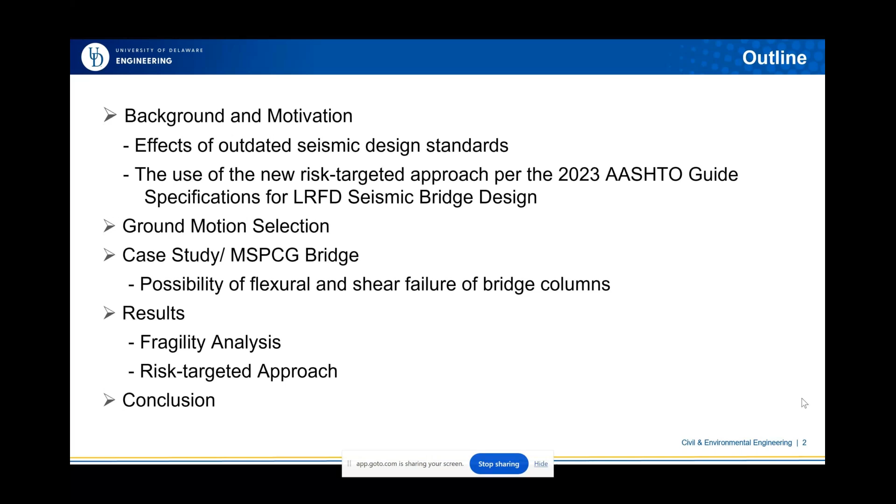Okay, starting with the background. In this research, we focus on existing bridges in the Pacific Northwest region, which includes both Washington and Oregon state, where the Cascadia Subduction Zone is located at the edge of these two states. The Cascadia Subduction Zone is one of the biggest subduction zones around the world, about 600 miles, running from British Columbia up to northern California.

The orange line in the figure shows the edge of the subduction zone where the subduction starts descending beneath the North American plate. The orange hatch area is the interface between the North American and subducting plate, where the great earthquake can be produced. This is characterized by its long duration earthquake, posing risk to the existing bridges in this area.

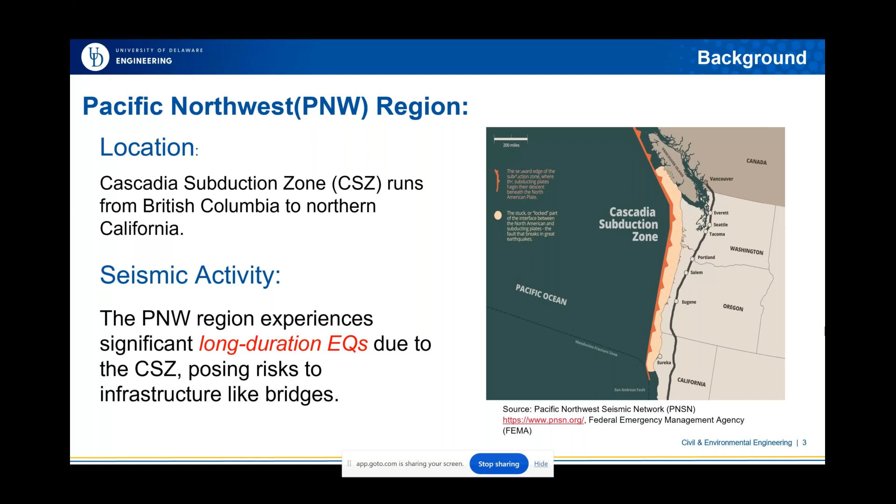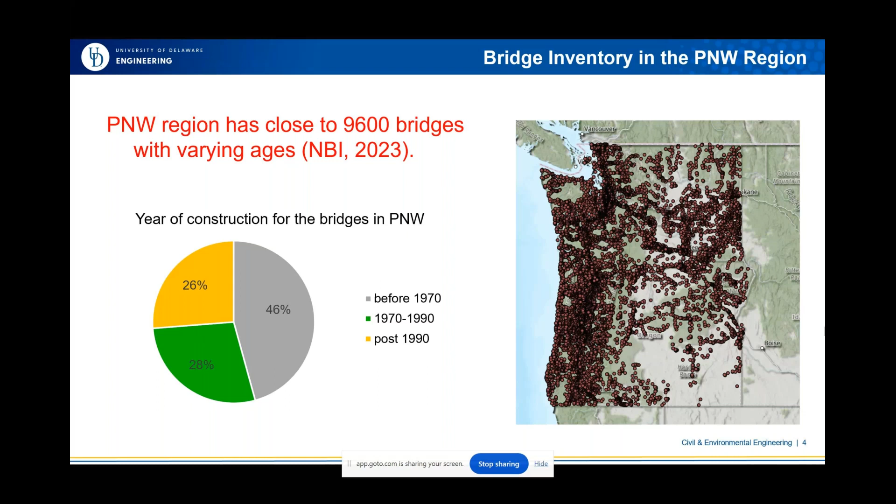So the main focus of this research will be on the multi-girder bridges that are built before the 1990s. Also, slab bridges constitute a large percentage of the bridges in this region, so we evaluated the behavior of slab bridges, but I did not include that here for this session. However, feel free to send me an email if you are interested to learn more about the slab bridges. We also considered the effect of skewness present in the slab bridges. But as I said, in this session we will cover only the multi-span precast concrete girder bridge.

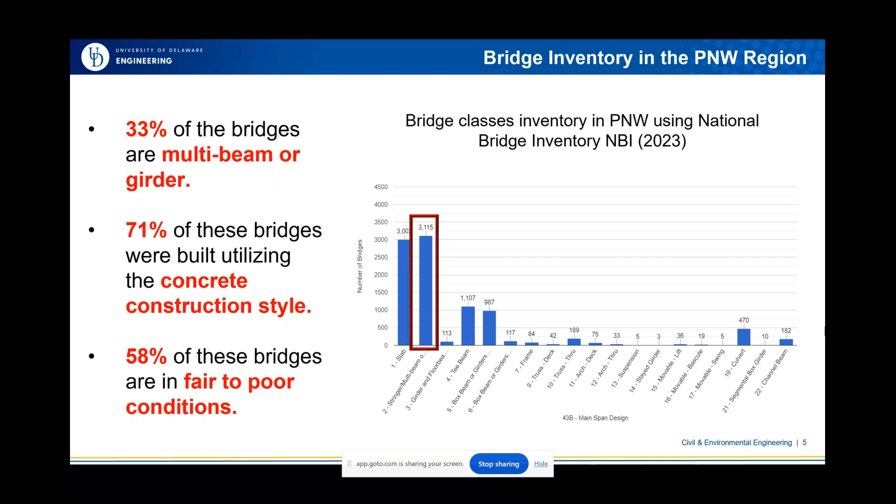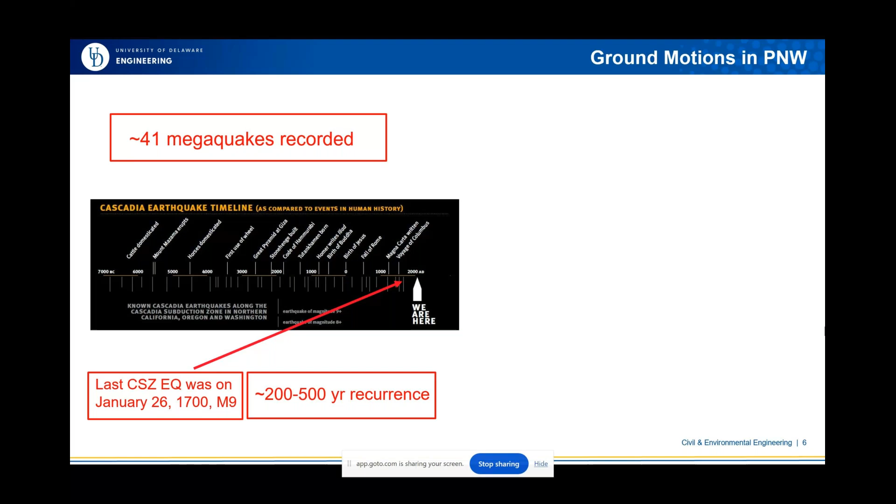Okay, a brief introduction about historic ground motion. This figure shows the Cascadia Subduction Zone earthquake timeline. It shows the 40 major earthquakes in the Cascadia Subduction Zone since 7000 BC, and the last known earthquake was in January 1700, about 320 years ago. The return interval for such an earthquake is about 200 to 500 years, so there is a high probability that the next earthquake will hit this region in the near future.

Also, aging bridges are more vulnerable to long duration earthquakes, especially when the natural period matches the frequency content and period of the earthquake, as we will see in the next slide. As we just saw, there is a significant number of aging multi-span precast concrete girder bridges, so the vulnerability assessment of these types of bridges needs to be identified, considering the substructure and superstructure complexity.

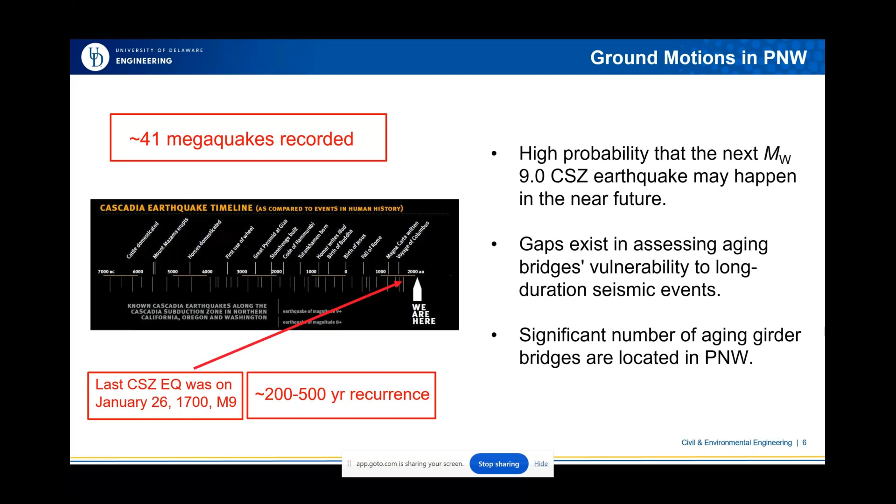So let me introduce some terminologies before we dive into the details. First is earthquake duration. There are two types of earthquake duration: long duration and short duration. There are several ways to define these types of duration, but the most recommended one is the 90% significant duration, which is the time interval for the strongest 90% of shaking. Records with a significant duration larger than 40 seconds are considered long duration earthquakes.

And records with less than 40 seconds are considered short duration earthquakes. The frequency and period for ground motion, frequency refers to the seismic wave generated by an earthquake, and it is the number of cycles within 1 second. It's measured in hertz, which means 1 hertz equals 1 cycle per second.

The period is inversely proportional to the frequency. So high frequency ground motion is more damaging to structures with a small fundamental period, and vice versa - low frequency is more damaging to structures with a high period, such as high-rise buildings and sometimes bridges. A long duration earthquake makes each of these cases worse. In other words, the worst case scenario or most damaging event is when there is a longer duration earthquake with a frequency content matching the natural frequency of the structure.

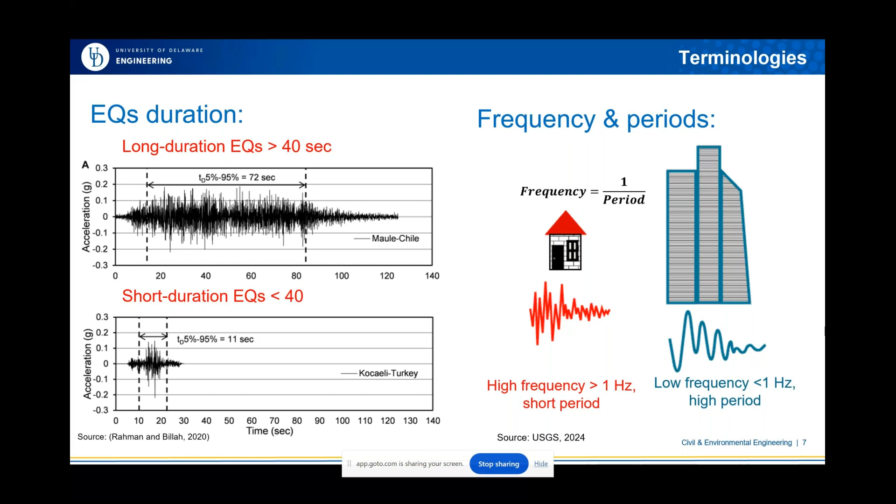So moving to the motivation of this research. As I mentioned, bridges built before the 1990s were designed with outdated safety codes, and this highly increases the risk of collapse in terms of flexural, shear, or flexural-shear failure.

One of the biggest problems with older bridges is that the columns were designed with widely spaced transverse reinforcement, which can easily lead to shear failure - and in some cases the shear failure occurs before even the yield of the longitudinal reinforcement.

These days, reinforced concrete construction has a higher transverse reinforcement ratio with better detailing, which results in improved behavior against seismic loads.

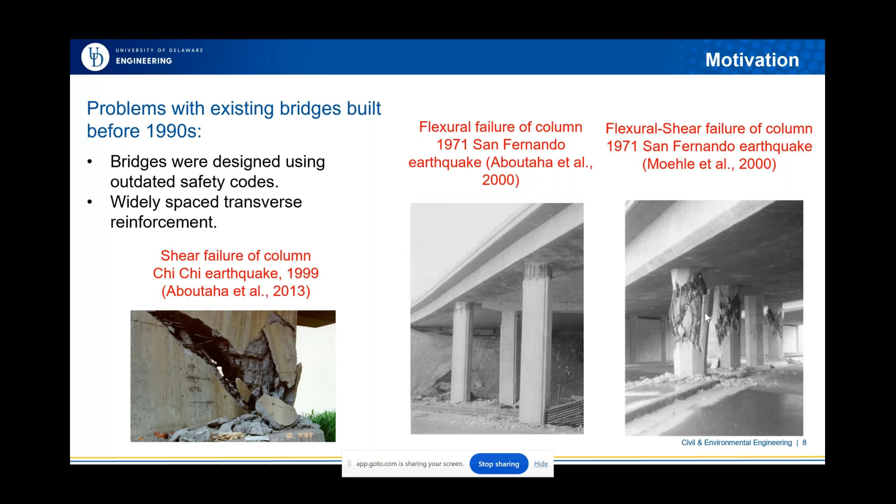One of the problems associated with the Pacific Northwest is that this region is susceptible to earthquakes, especially long duration earthquakes. Also, there has been little work conducted on the probability of failure in terms of flexural failure and shear failure, and also the combined flexural-shear failure, for multi-span precast concrete girder bridges located in high seismic regions and subjected to long duration earthquakes, such as those produced by the Cascadia Subduction Zone.

Usually the most powerful earthquakes occur at subduction zone regions, with a magnitude of 8.5 to 9, and sometimes more than 9. So in this study we will focus on evaluating the behavior of multi-span precast concrete girder bridges, assessing the flexural failure and shear failure for this type of bridge.

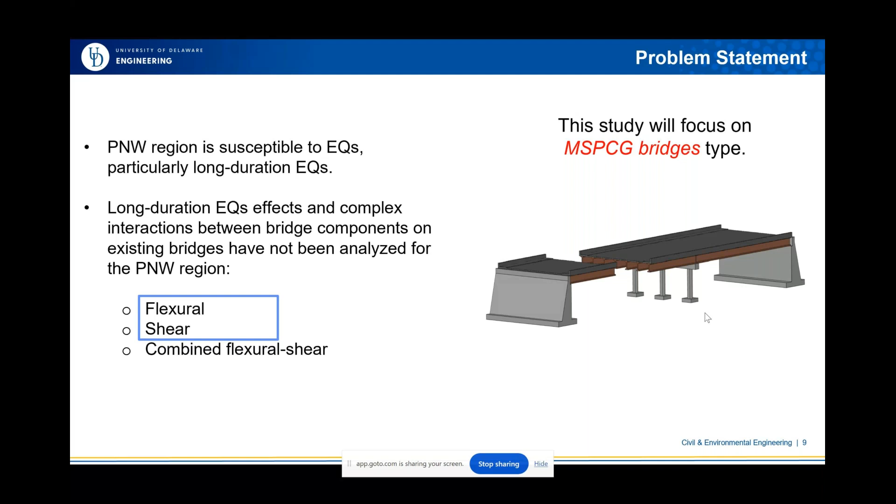Another problem associated with vulnerability assessment and risk of collapse is the approach used for the design ground motion, which ultimately affects the structural response to earthquakes.

The ninth edition of AASHTO uses uniform hazard for the design ground motion. The figure here shows the uniform hazard for 8 locations across the Pacific Northwest. One of the shortcomings of the uniform hazard approach is that it ignores variation with location, especially when designing for a large return period, such as 2,500 years or 1,000 years.

For example, this shows the design spectral acceleration for a 1,000-year return period for 4 different locations, and as you can see, the design spectral acceleration is almost the same for all of these locations. So this is one of the shortcomings.

Another shortcoming is that it's designed based on one selected point, which ignores the uncertainties associated with the ground motion and the design spectral acceleration. This is what motivates researchers to move to the risk-targeted approach.

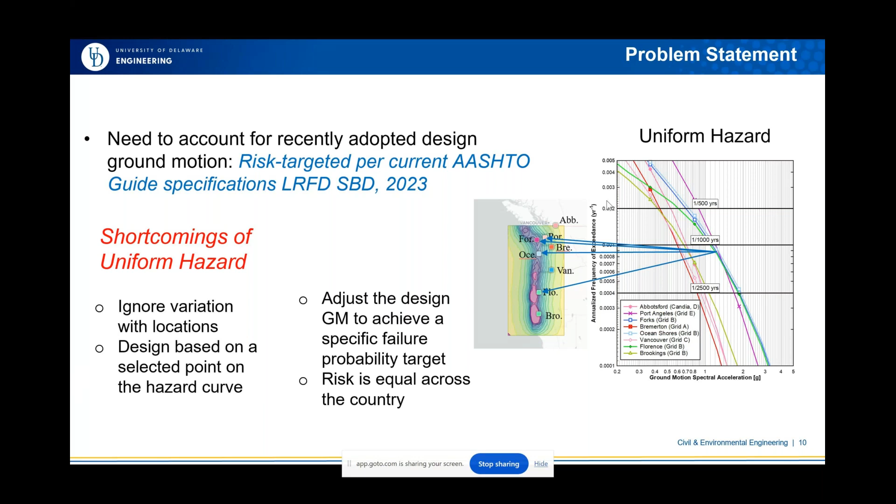This figure shows the comparison of the design spectral acceleration from the uniform hazard approach per AASHTO 2020 to the design value obtained using a multi-period design spectrum per AASHTO 23, which mainly uses the risk target approach. This is for 8 locations across the Pacific Northwest, categorized into two groups, inland and coastal. The comparison is shown for two periods, the 0.2 second period and the 1 second period. The blue represents AASHTO 2020, and the orange represents AASHTO 23 using the risk target approach.

These cities here represent the inland cities, and if you can see, it's obvious when considering the variation of the design spectral acceleration.

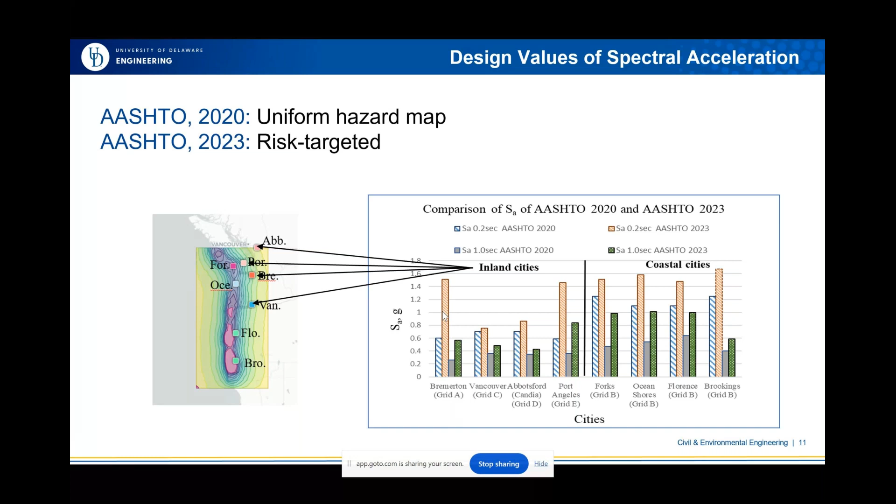This figure also shows the comparison of the design spectral acceleration for both the 0.2 second and 1 second periods for the coastal cities. From that we can see that the design spectral acceleration based on the risk target is higher than the design spectral acceleration based on uniform hazard. So bridges designed according to the risk target approach may suffer less damage.

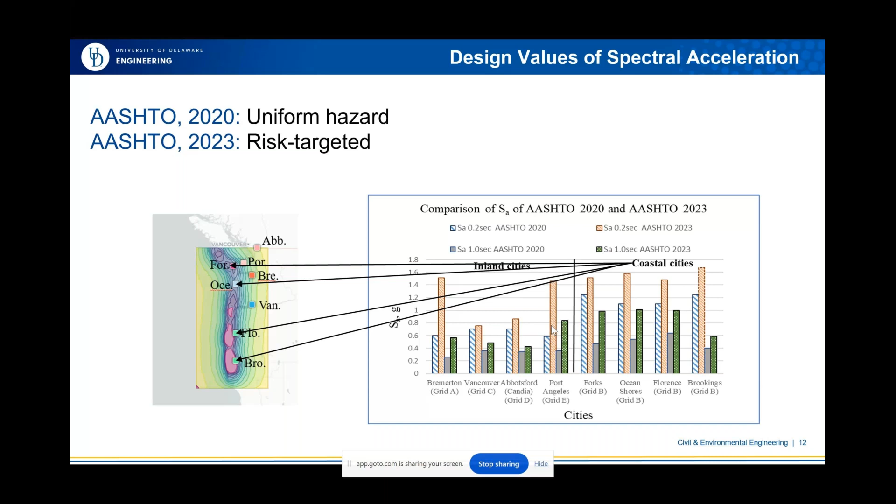Let me introduce some terminology to make the rest of the presentation clear. One term we'll use is hazard. Hazard is the response of a single degree of freedom structure to ground motion, basically the likelihood of the spectral acceleration being exceeded for a certain time, like 75 years, 50 years, or 100 years. Fragility is the probability of experiencing damage, like yielding, spalling, or collapse.

When we combine hazard and fragility, this gives us risk. Risk is mainly the probability of damage, like incipient collapse, within a given time. So the risk target ground motion is a design motion to achieve an equal risk level across the country.

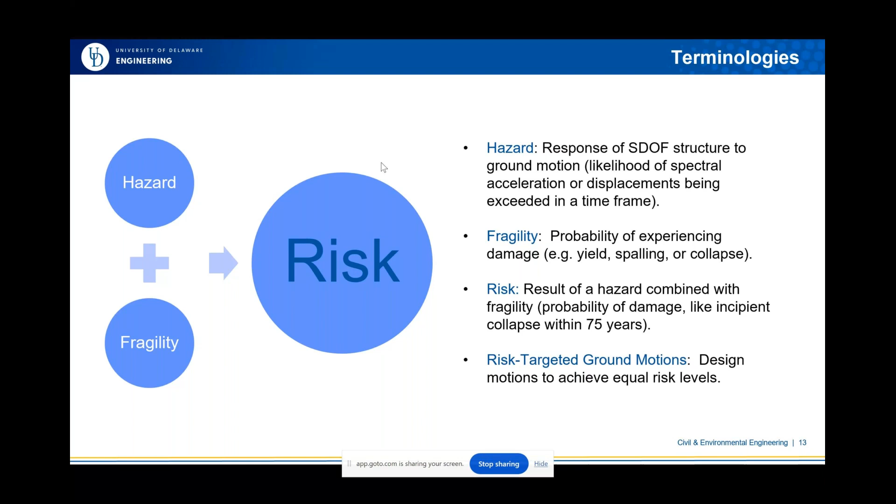Moving to the methodology overview, three parts are involved in the methodology for this research. The first part is modeling, so I used the OpenSees model. OpenSees is an open source finite element software that the earthquake engineering community broadly uses to simulate the seismic response of structures.

Then the tool we used was an analytical fragility function, one of the widespread methods used in seismic evaluation of existing bridges. The third part is the risk assessment, the risk target methodology implemented in the AASHTO Guide Specification for LRFD 23 seismic bridge design. This approach combines the hazard curve and fragility curve. We will go over more details about the calculation of risk for these types of bridges, the multi-span precast concrete girder bridge.

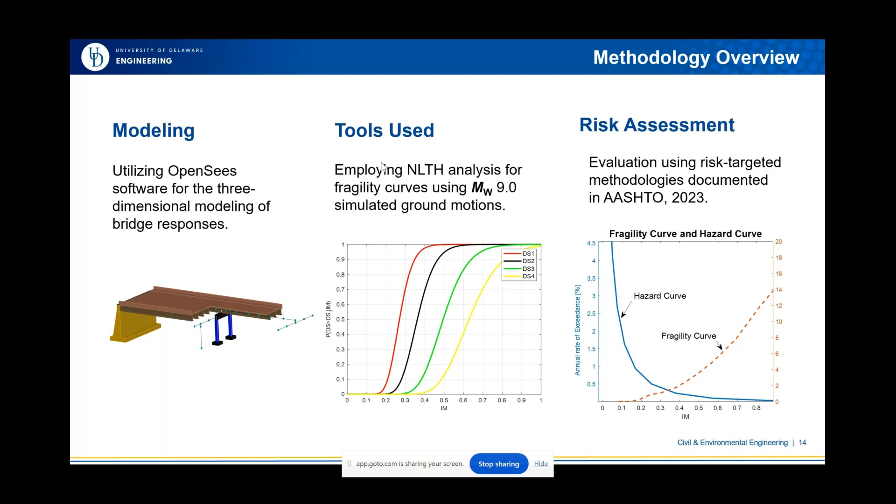Moving to ground motion selection, in order to evaluate the potential effect of ground motion on bridges and buildings, we are looking for ground motions with magnitude larger than 5.5 or maybe larger than 6, with close distance to rupture. Also, because there are not enough records available for the Cascadia Subduction Zone, and because our focus is on long duration earthquakes, we used simulated ground motion developed by a group of researchers at the University of Washington.

They developed the M9 simulation ground motion, generated for the Pacific Northwest region. The ground motions were created for 30 different rupture scenarios for each location, varying in hypocenter location and slip distribution, with a large set of frequency content ranging from 0 up to 10 hertz. The low frequency range is between 0 and 1, and the high frequency range is between 1 and 10 hertz.

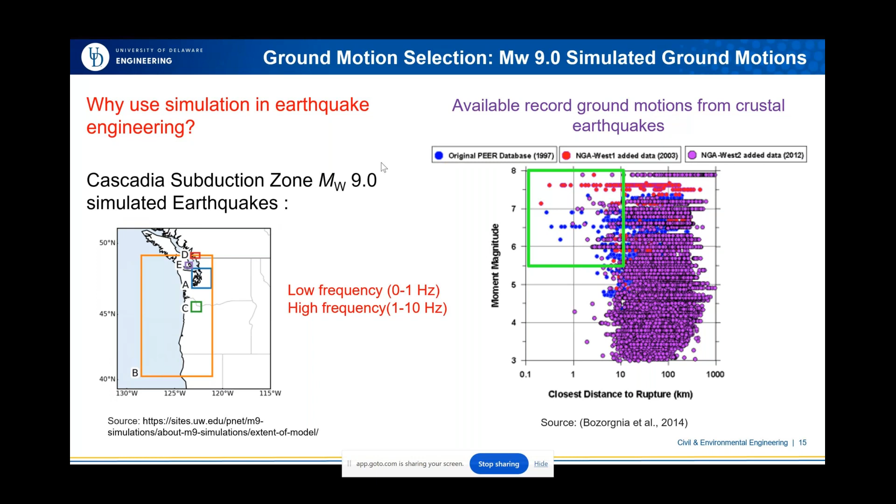A proper set of earthquakes is really a critical step in developing a fragility curve. The record should contain a vast collection of different seismic intensities and earthquake magnitudes, and different distances to rupture, to better represent the hazard uncertainties. For this study, we used 8 locations across the Pacific Northwest, each with 30 different rupture scenarios, so we are talking about 240 ground motions.

Based on distance to rupture and site characteristics, the 8 locations are characterized into two groups, coastal and inland. The inland cities are further categorized into 3 groups based on shear wave velocity: deep basin, outside basin, and shallow basin. The table here shows the peak ground acceleration and the site class, which we considered in our analysis.

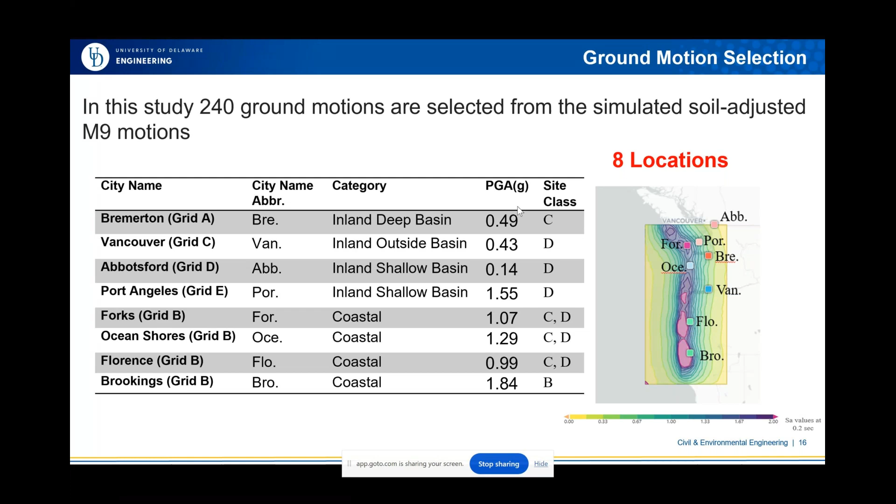Moving to the case study used for the analysis. We use a two-span girder bridge with a bent cap at the middle and three circular columns. This bridge was modeled using OpenSees. The bridge is located in Washington, so all the drawings and plans are from the Washington DOT.

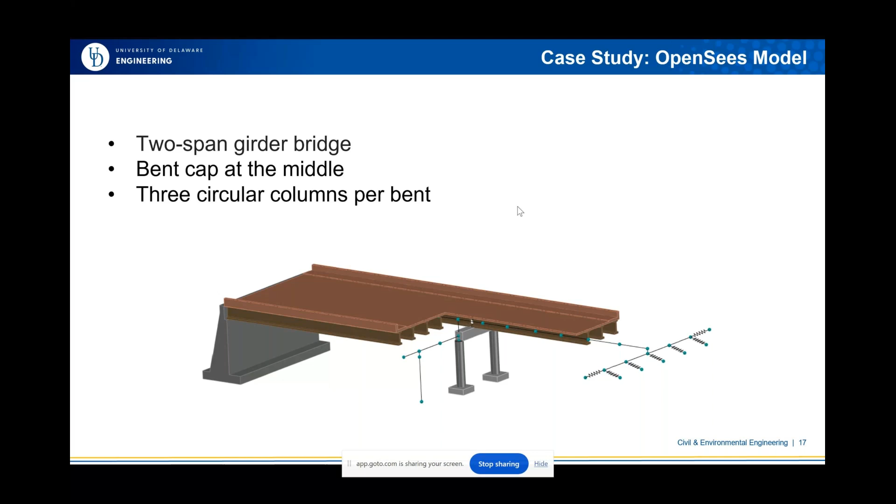The figure shows the superstructure and substructure configuration and material properties. We use elastic properties for the superstructure and fiber sections for the substructure, which include both column and bent. We use the elastic perfectly plastic gap to represent the behavior of the abutment using zero-length elements, and we subjected this model to 240 ground motions.

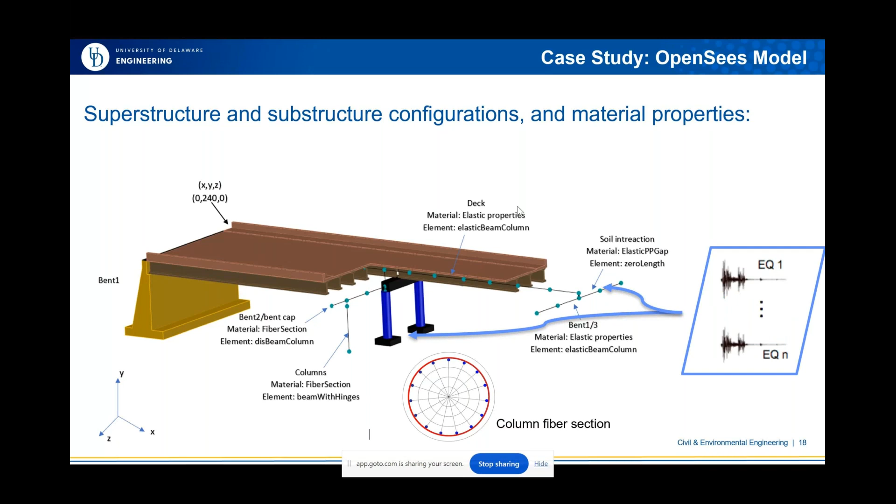For the boundary condition, both for the abutment and for the column base, we use a combination of linear springs. All the parameters or equations used to simulate the behavior of the abutment and soil interaction were based on Caltrans.

This figure shows the two models for the longitudinal spring and then for the transverse spring. Also, the figure shows the schema of the models of the interaction between the column base and the soil. We use a horizontal spring and a rotational spring.

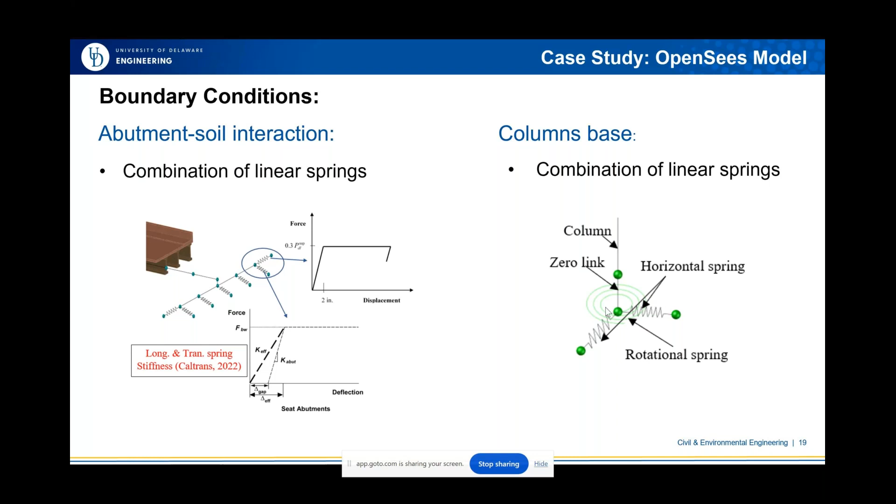Moving to the material used for the case study. We use Concrete01 for the unconfined concrete. This type of concrete accounts for the compression of the concrete but does not allow any tension.

We use hysteretic material for the reinforcement. This type of material has the ability to model the damage due to energy and ductility.

However, the other type of concrete used for the shear assessment is Concrete06, a uniaxial concrete model with tensile strength and nonlinear tension stiffening using the Thorenfeldt curve, which is shown here, and this represents the confined concrete.

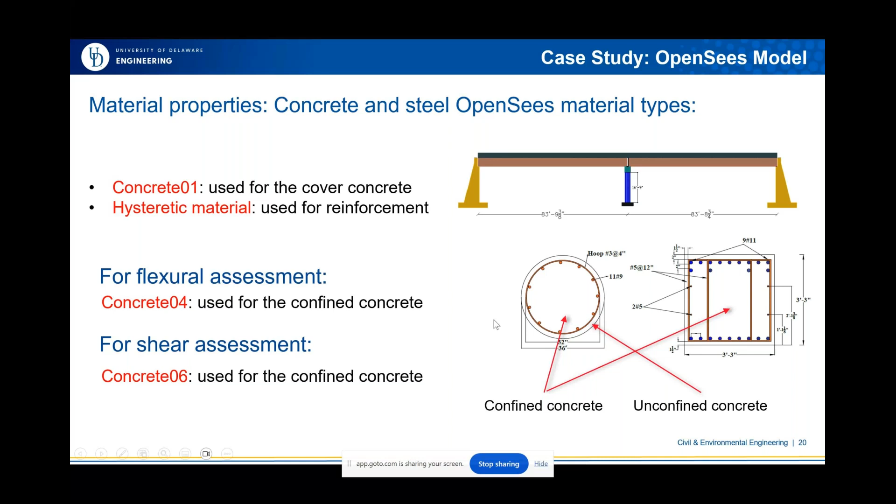Moving to the results of our analysis. When we evaluate the seismic damageability of the bridge, it's important to account for the directionality of the ground motion. The girder bridge here is analyzed under the set of 240 ground motions in the longitudinal direction and in the transverse direction.

The longitudinal direction produces a larger demand than the transverse direction for the girder bridge for the different components. We calculate the displacement of the column, the right abutment displacement, the left abutment displacement, and the bent displacement. For this research, we focus only on the effect of the ground motion in the longitudinal direction.

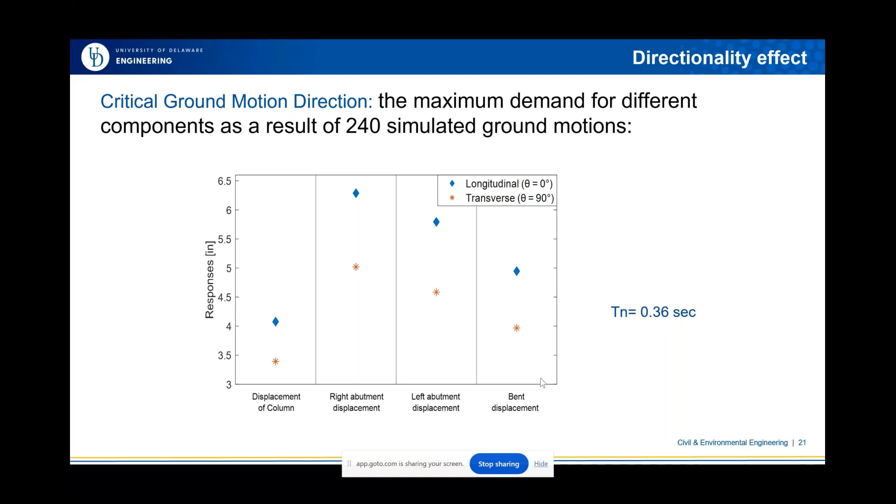Probabilistic seismic demand model. In order to predict the risk of damage to Pacific Northwest bridges, we have to quantify the seismic demand of the structure by developing a probabilistic seismic demand model, and then based on that we can define the fragility curves.

The probabilistic seismic demand model is a relationship between the engineering demand parameter and the intensity measure. We use regression analysis to compute the median value of the demand, and then we use this equation to compute the dispersion of the demand.

For the flexural assessment, we use peak ground acceleration and spectral displacement as an intensity measure. For the shear assessment, we use drift ratio as an intensity measure.

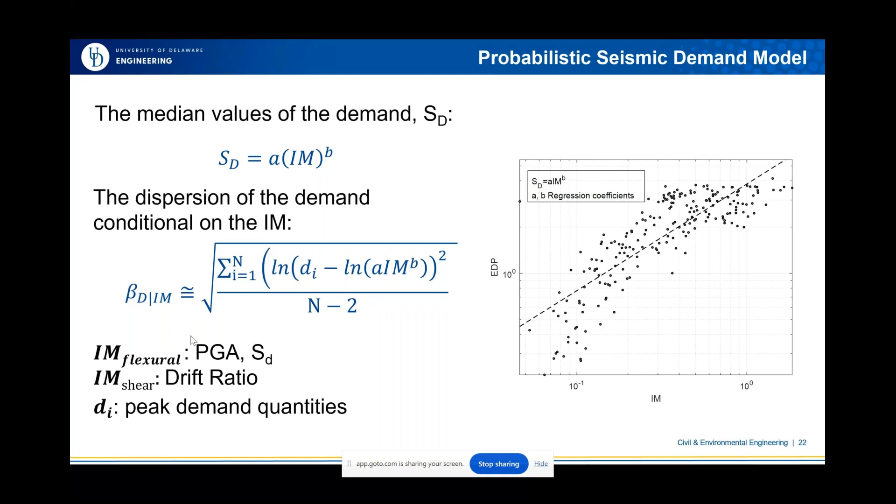Moving to the damage state. The damage state for the flexural assessment is based on the definition of the damage state defined by HAZUS. We define four damage states, which are slight, moderate, extensive and complete damage state, and this is the definition considered by HAZUS.

And then we use displacement ductility as an engineering demand parameter.

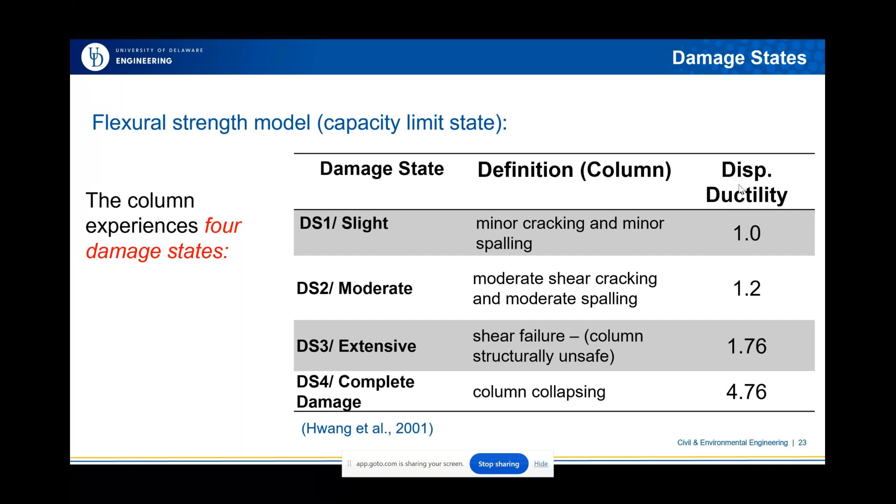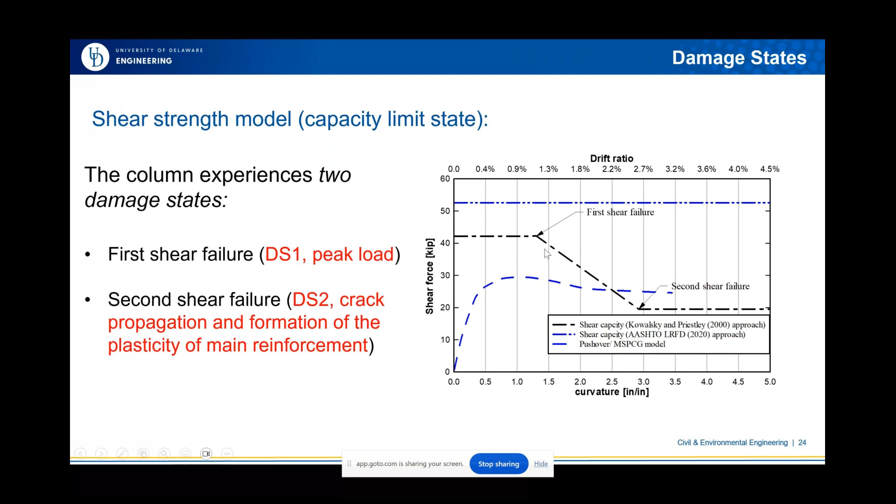For example, the probability that the structure exceeds damage state 3 for a given certain intensity measure represents the probability of failure. Also, if we want to know the probability that this bridge will experience no damage under a certain intensity measure, this represents the probability that the bridge will experience no damage.

There are several methods that can be used to construct a fragility curve. Some of them are empirical method, expert based method, or analytical method. This depends on the data available. For this research, we are using the analytical method.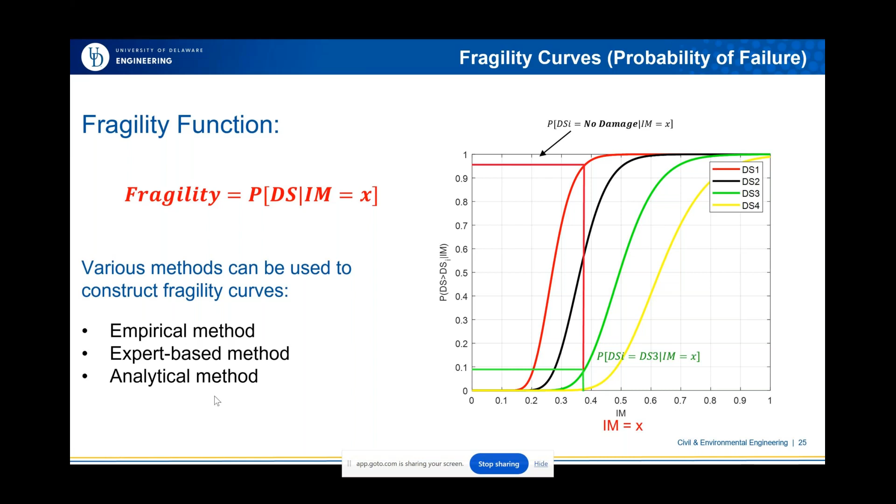So for the bridge, if you can see, all three columns have experienced the same demand. So we just select column number 1 for the analysis, and we recorded the data from column number 1.

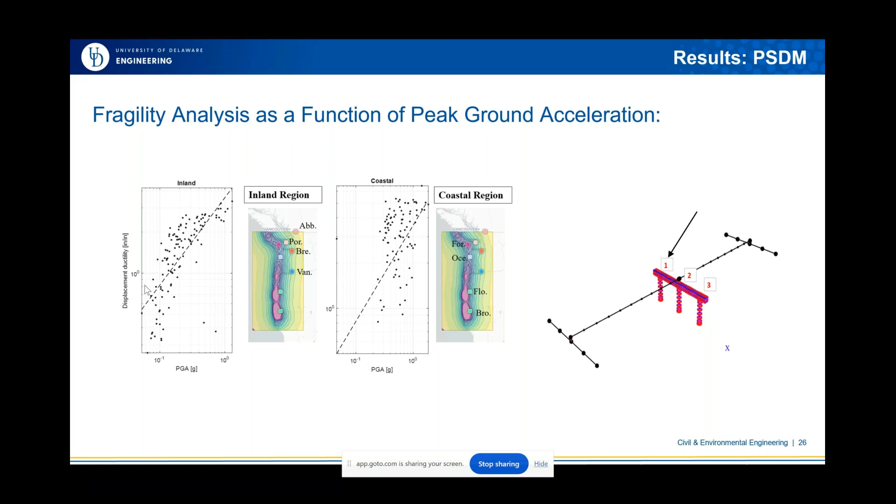As we can see here from the probabilistic seismic demand model, there is a considerable difference in the column demand for the inland cities compared to the coastal cities, where the demand of the bridge columns is higher in coastal cities than in inland cities, and that is mainly because these types of cities are close to the active fault.

Using the probabilistic seismic demand model and the capacity limit state, the fragility curves were developed, where the fragility curve relates the ground acceleration to the probability of damage for different damage states. The probability of failure, what we can see here, again this is for the coastal and inland cities. For the coastal, the probability of failure is higher than for inland, which is again for the same reason, because the coastal is closer to the active region than the inland cities.

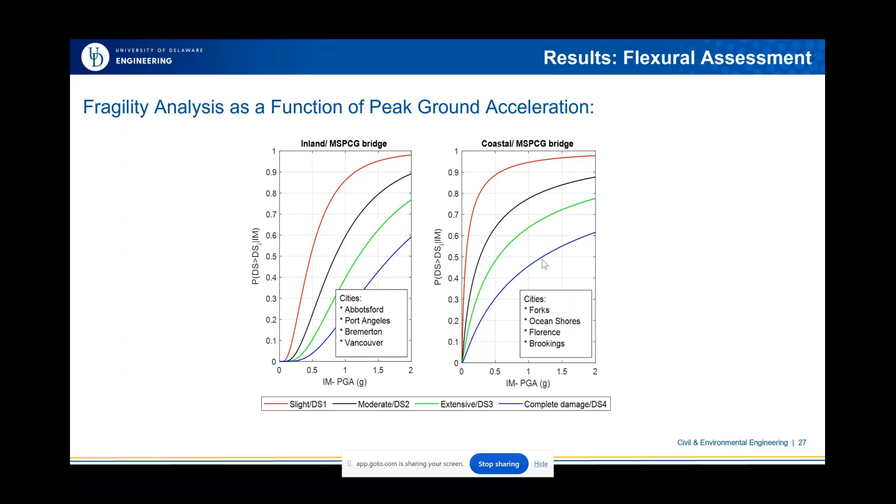Moving to the evaluation of the National Seismic Hazard Map 2018. The National Seismic Hazard model for the US was improved during 2017 and 2018 to include the amplification effect for long period ground motion located in deep sedimentary areas. So we compared the new National Seismic Hazard model for ground acceleration with the result from the nonlinear time history analysis using M9 ground motion.

The data here was for site class D. As we can see here from the fragility comparison, the girder bridges will experience less probability of failure using the National Seismic Hazard model, specifically for higher ground acceleration, which means that the M9 event is not well captured by the National Seismic Hazard model, and no obvious consideration is given to large events such as M9.

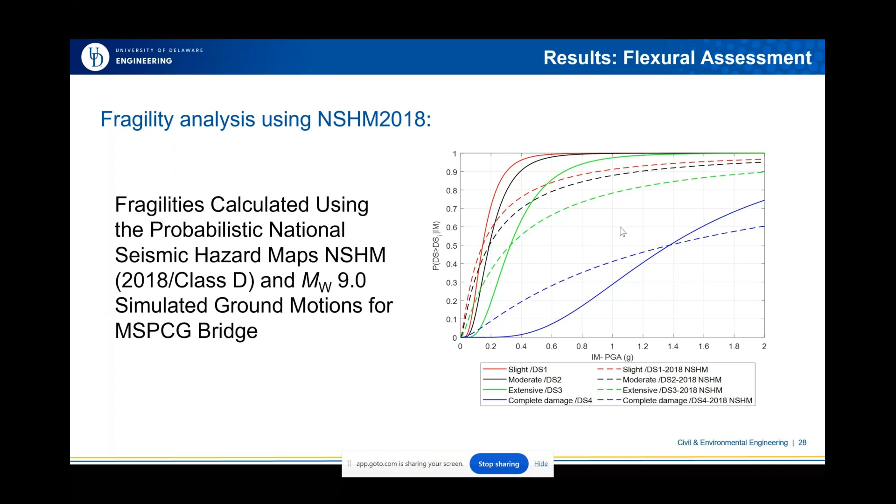Focusing more on the effect of the deep sedimentary layer by itself, since the new National Seismic Hazard Model 2018 includes the effect of deep sedimentary layers, and the M9 model also includes the effect of deep sedimentary layers.

We compared the cities that are located on deep sedimentary layers. What we found is that it seems that the probability of failure due to M9 increases higher in deep sedimentary areas, and is still higher than the National Seismic Hazard model, which again shows the effect of deep sedimentary layers when this area is hit by M9 will be different than what the National Seismic Hazard model 2018 captured.

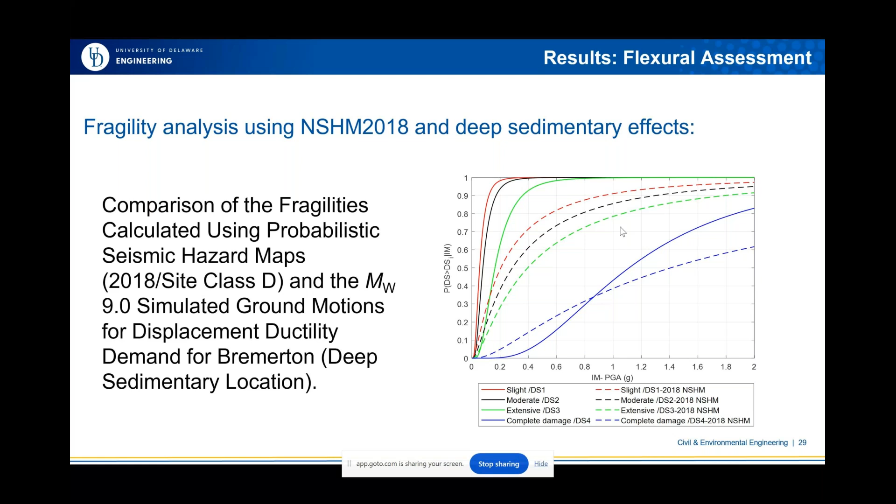Okay, moving to the shear assessment. For the shear assessment, the column was modeled in a way that ensures this column will fail in shear and not in flexure. It was modeled with wide-spaced transverse reinforcement, as you can see, it's 12 inches, and we decreased the concrete strength by 30% to avoid increasing the shear strength. However, the moment at the base is also checked to be less than the moment section capacity, including the interaction effect from the axial load, just to make sure that this column will fail under shear and not under flexure.

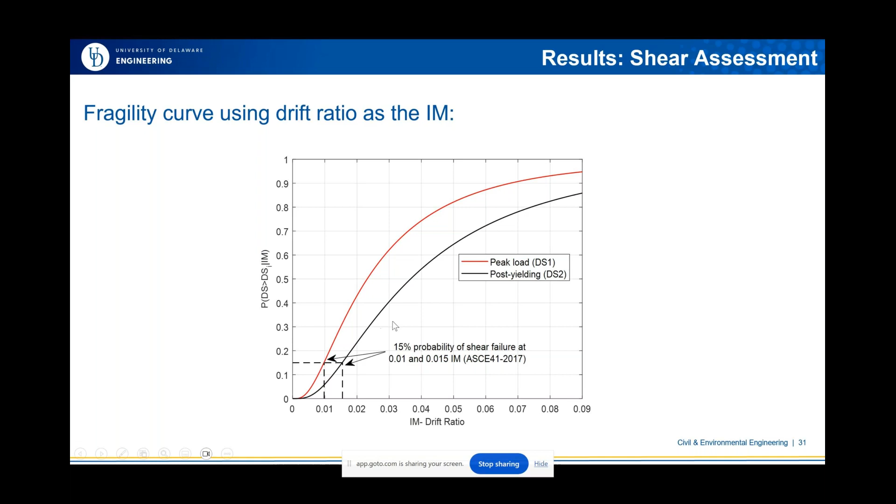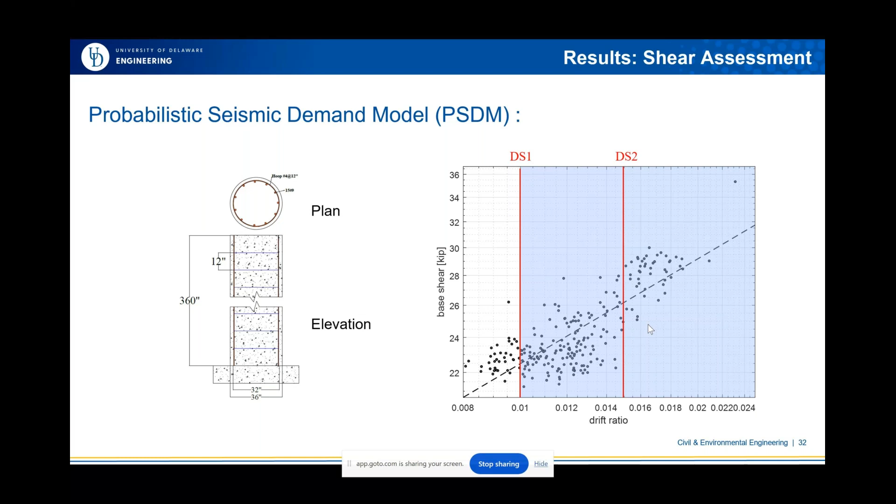So what we did, first we compute the risk based on M9, again a combination of the hazard curve and the fragility from the M9. And then we calculate the risk based on the notional fragility. The notional fragility is a generic fragility curve adapted by the AASHTO Guide Specification to represent the failure of the column by formation of a plastic hinge.

So we compare the risk from the M9 to this, which is the generic one, and also we compute the risk based on USGS, which is a calibration between the load and resistance factor to get the index measure, based on calibrating the load and resistance factor to obtain the target reliability index, and then this reliability index is used to adjust the design ground motion.

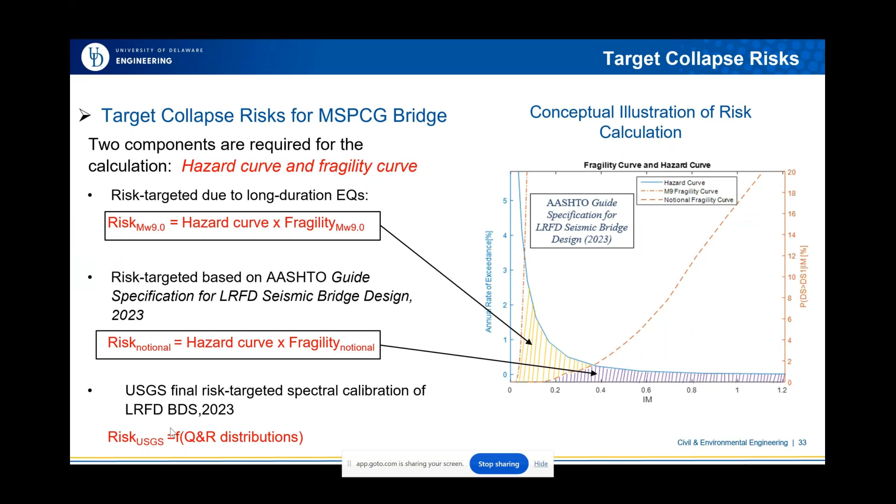So we use this equation to compute the risk. This equation is based on AASHTO Guide Specification '23, which is basically, in order to compute the risk, you have to get the total probability, which is the summation of the multiplication of the numerical integration for both fragility and the hazard. Again, based on AASHTO Guide Specification '23, they specify the risk of collapse to be 1.5% in 75 years, and based on USGS AASHTO, the specification limit is 7% in 75 years.

In order to compute the probability of collapse, we use this equation, which is 1 minus 1 minus total probability. And again, this is based on AASHTO Guide Specification for LRFD '23.

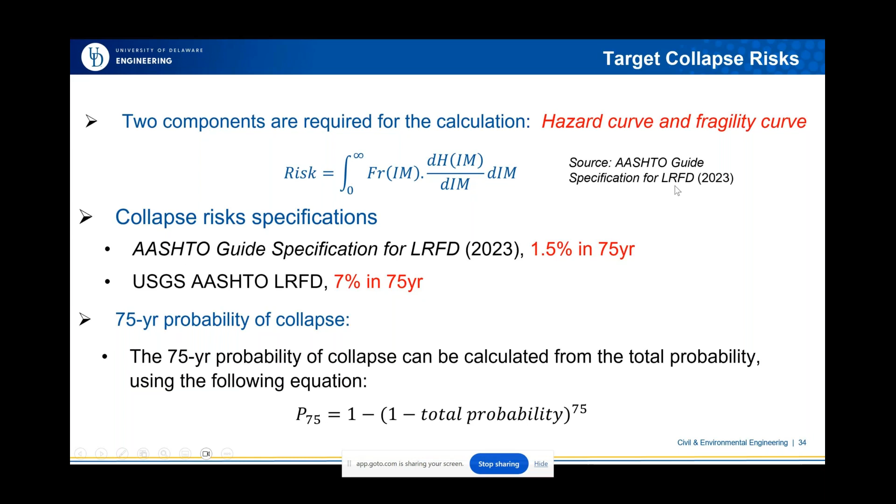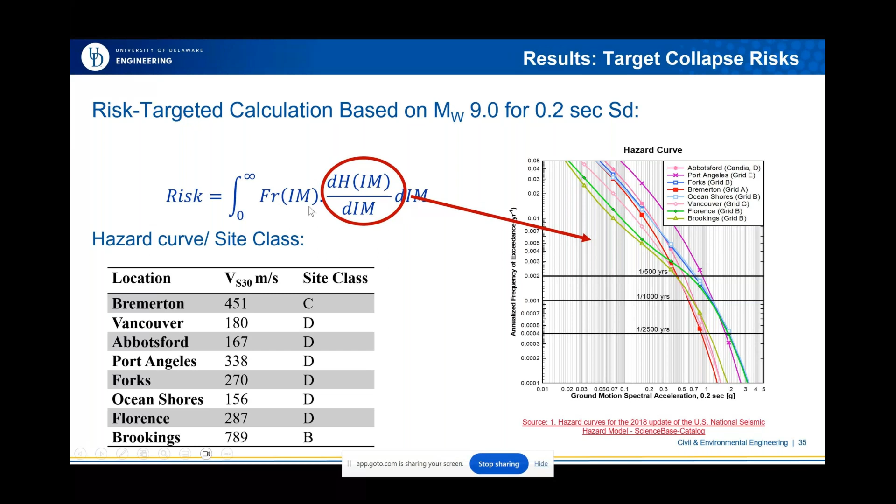Since we have 2 groups, we pick the highest annual exceedance for all 4 cities for the inland group. Port Angeles has higher annual exceedance, and for the coastal cities, Ocean Shores has higher annual exceedance. So these two will represent the risk for these 2 groups.

For the fragility curve, we use damage state 4, since we are more interested in the risk of collapse, and damage state 4 represents the collapse. For the engineering demand parameter, we use displacement ductility, since displacement ductility better represents the inelastic behavior of the bridges compared to the force approach, which is the acceleration times the mass. Again, the intensity measure here is the spectral displacement.

What we found is that the risk target for inland is 7.3, and for coastal it's 4.7. The risk of collapse in inland is higher than in coastal, mainly because inland cities have a higher annual probability of exceedance than coastal cities. Also, these risk values are significantly higher than the specification limit of 1.5, meaning these types of bridges are under high risk of collapse.

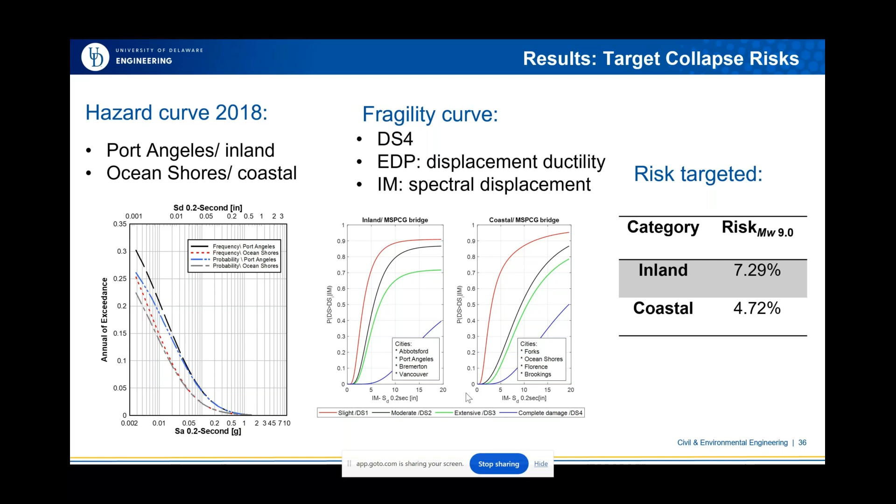We compared this to the risk target using the notional fragility function. The figure in the middle shows the notional fragility, which is a generic fragility function. However, these types of fragility represent new design, not existing design.

We combine this with the annual probability of exceedance to compute the risk. For inland cities, the risk target is 2.79, which is higher than the specification limit of 1.5, but still less than what comes from the existing approaches. For coastal cities, it's still within specification.

Based on the AASHTO Guide Specification 23, if you get a higher risk than specification for the design ground motion, one method that can be used is to increase the design spectral acceleration. Once we increase it, that makes the fragility probability of failure less, because the hazard is still constant. So once we get less probability of failure, we get less risk.

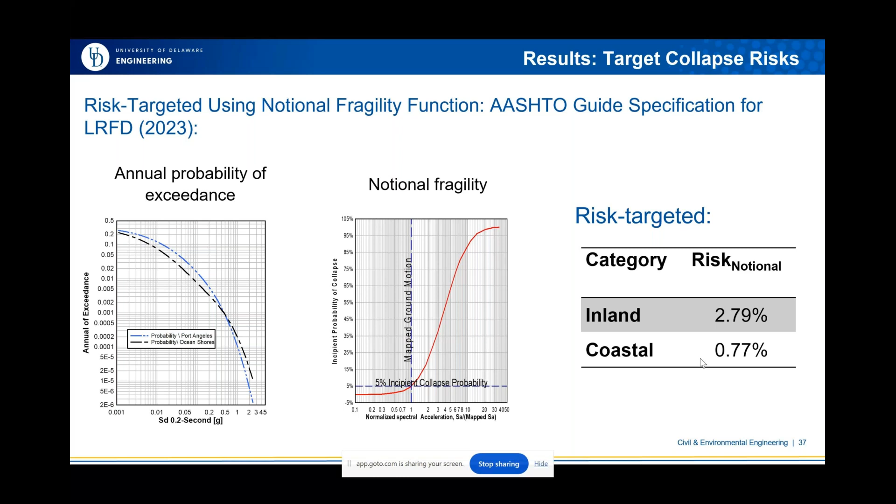The third risk metric, we compare these also to USGS. The table here shows the spectral displacement based on the risk target ground motion using USGS 23. We took the design spectral acceleration, plugged it into the hazard curve, computed the total probability of exceedance, and used this in the equation to compute risk over 75 years.

What we get for inland cities is 6.5, and for coastal, 4.25. These risk values are still less than the specification based on USGS AASHTO, which is a 7% probability of exceedance.

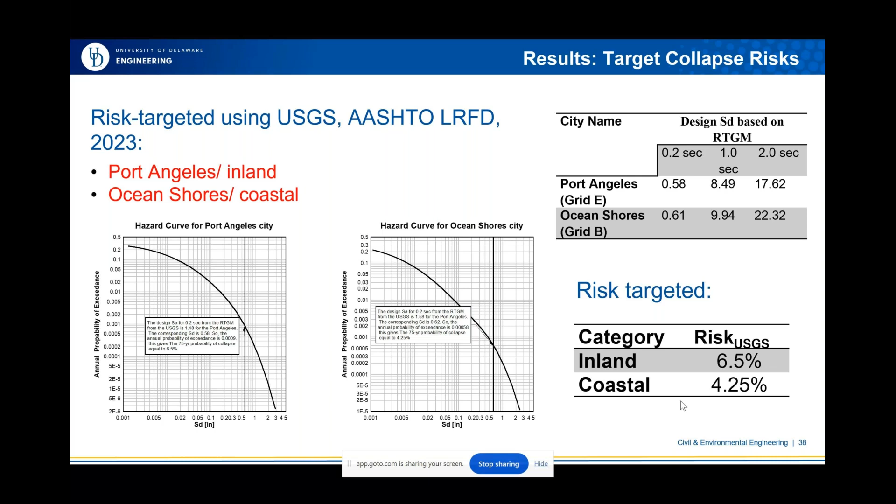Here the table shows the final conversion of the computed risk. Again, we use M9 simulated ground motion for the multi-span bridges—this should not only apply to multi-span bridges. We use the notional fragility based on AASHTO Guide Specification, this is the limit state, and based on USGS AASHTO, which is 7% probability over 75 years.

We get the probability of failure for existing bridges higher than what we have based on the notional risk and the USGS risk. This is for existing bridges, and most of these bridges have reinforcement detail less than what is required right now. Most were conventionally designed, not seismically designed, so we expect these types of bridges to have a higher risk of collapse.

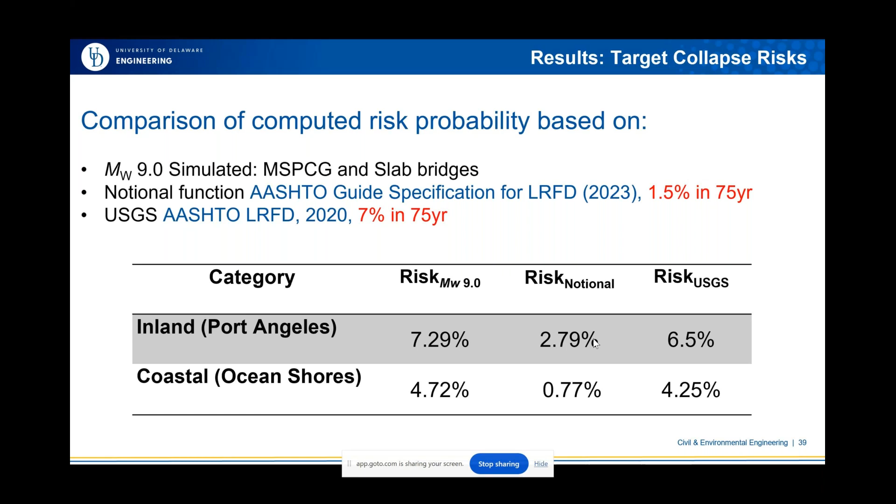I'll move it to Dr. Head to go over the summary and conclusion and wrap up the session.

Thanks, Dr. Arbayes, great presentation. To summarize, we're really excited about this work. Existing multi-span pre-stressed concrete girder bridges were modeled in OpenSees and evaluated using this vulnerability assessment framework, which is not new, but the point is that using these risk-targeted approaches, we were able to compare different methods from AASHTO LRFD and the pros and cons for an existing structure. A lot of this work has been mainly framed around new design, but this research gained insight into variations that need to be considered for further analysis.

We also noted that both flexure and shear failure of the multi-span precast concrete bridge columns were investigated using a fragility analysis, and we noticed that the National Seismic Hazard Maps 2018 show the effect of deep sedimentary basin effects, which are reflected in those maps, and its influence on how ground motion amplifications impact structural demands.

Last but not least, our collapse risk was assessed using three different methods, where the goal was to really look at risk with these different approaches. Next slide, please.

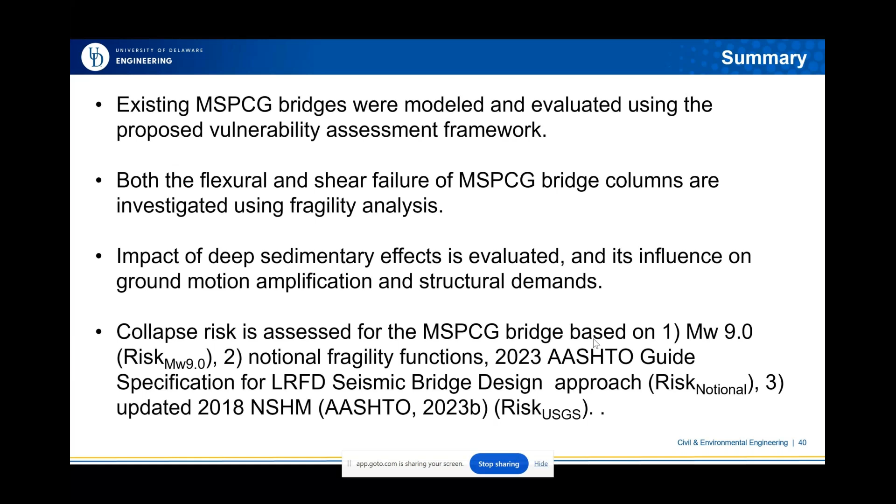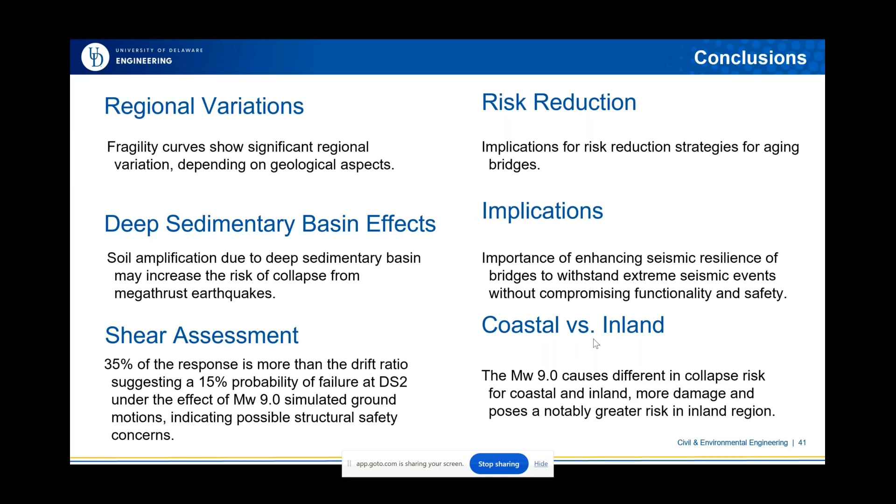Next slide. Thank you, that wraps up our presentation for today.